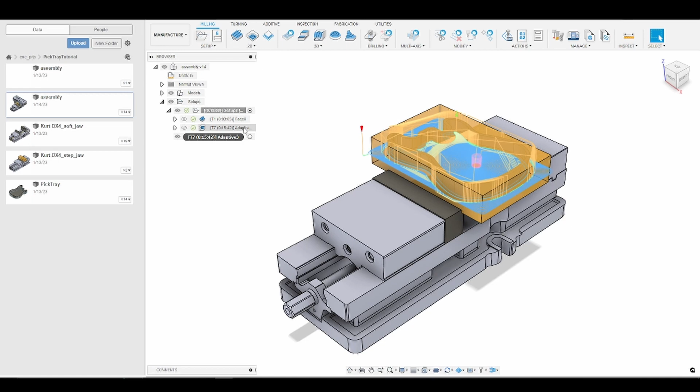So we did the first adaptive clearing operation with our 3/8 end mill previously. So we actually want to keep that same geometry and most of the parameters. So all that we need to do is right click our previous 3D adaptive clearing and go down to create derived operation. We'll go to 3D milling and then we'll click adaptive clearing again. That will bring over most of the parameters for us, and I'll show that to you. So now all we need to do is select the correct tool.

This time we are going to be using a 1/4 inch end mill, and I am going to be using a 3-flute 1/4 inch end mill from Shars.

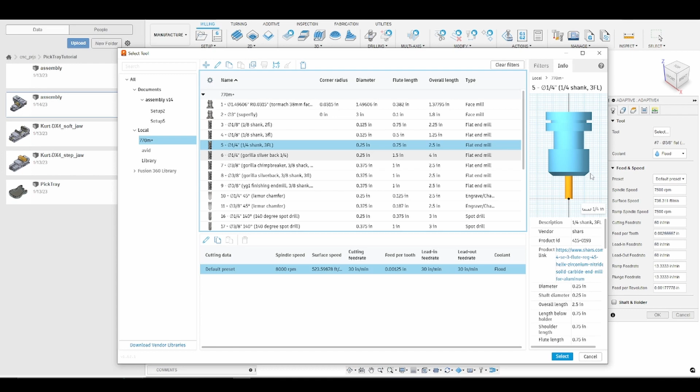So again, we're going to select our tool, click OK. Now we are running at 8,000 RPM and 30 inches per minute. So because the diameter is smaller, we can introduce more deflection, so we're going to be running slightly slower. Again, we can skip over the geometry tab since it's a 3D toolpath and Fusion takes our geometry into consideration for us. If we go back to the heights tab, you'll notice that Fusion, since we did the derived operation, kept our parameters for us. So the top of the model is selected so that we are not, again, cutting air.

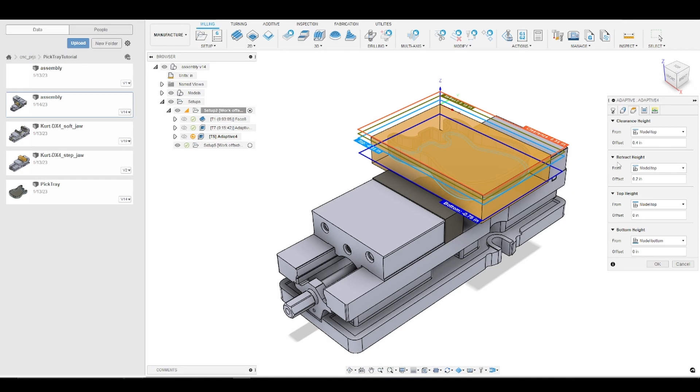All right, moving on to passes. You'll see that we still have our 20 thou stock to leave and a 30 thou optimal load. Now, our end mill diameter did change, so we're going to adhere to that around 10% rule of thumb for the diameter of the end mill, still sticking at 8%. So I am going to go at 20 thousandths for the optimal load. Again, sticking around that rule of thumb, 10% of the diameter, since we are using a smaller tool.

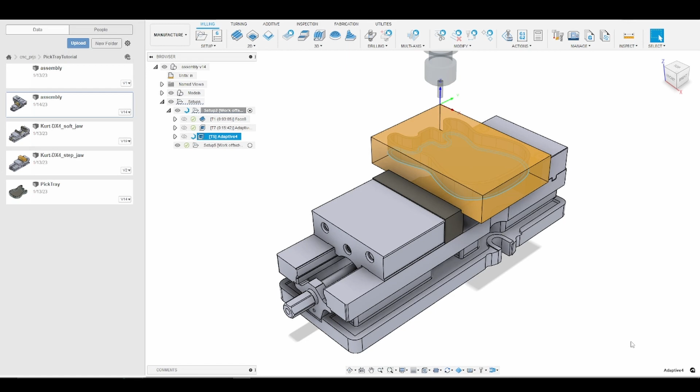All right, now we will just go ahead and go to our linking tab. And again, you'll notice that we have our ramp clearance at 10 thou for any helical entries. And we have our stay down level to least, which is exactly what we want as we went over in the previous tutorial. So we'll just go ahead and hit OK. And then we will quickly simulate this toolpath. And what you should see is that we will go in and clean up those tight areas that we were not able to get during the first operation. So we will go ahead and click simulate.

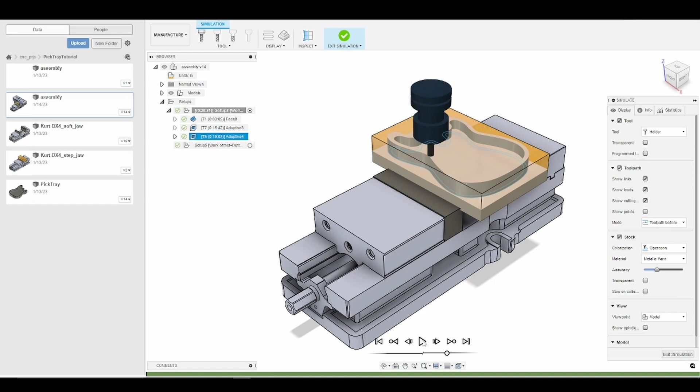And you'll notice this toolpath again just takes a long time because it is a roughing strategy. We're removing a lot of material. So we'll slow it down so we can see. We'll press OK. So again, we're just going in and getting rid of all that material that we couldn't get with the 3/8 end mill. All right. So we'll speed it up a little bit and wait for the simulation to finish. There we go. So now our part is completely roughed, and we'll go ahead and start finishing our part.

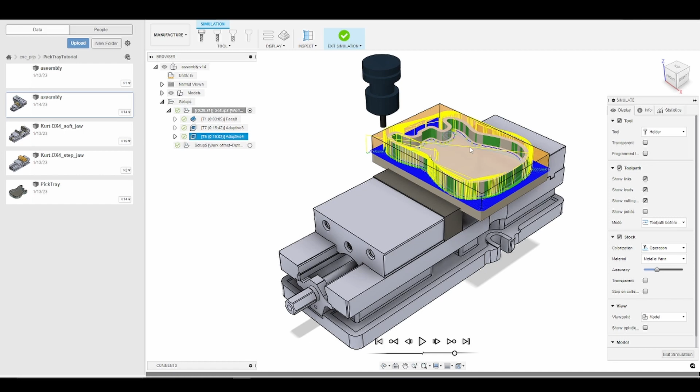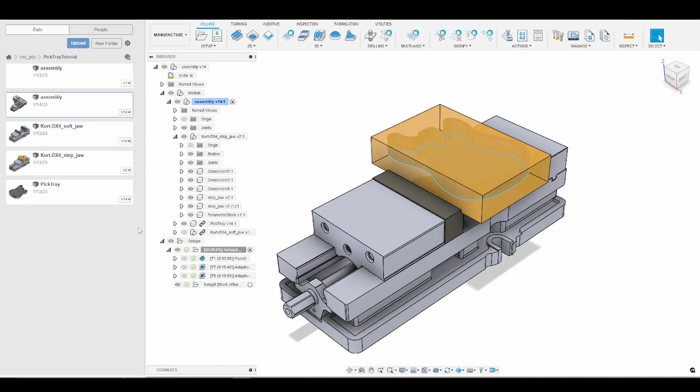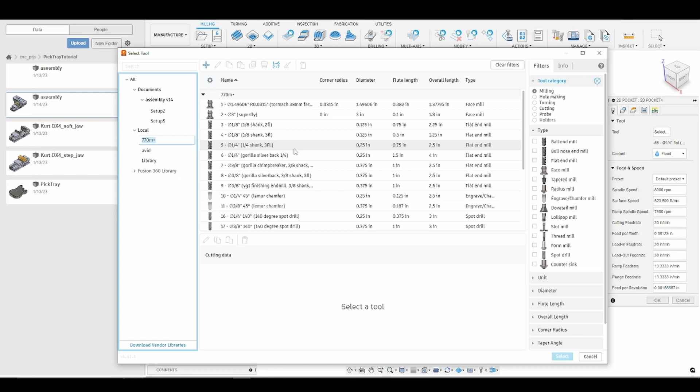So to begin our finishing operations, we're going to perform a pocketing operation. So we're going to clean up the floor and the side walls on the inside of our pick tray. And so the first thing I'm going to do is hide our parametric stock just to make it easier to select our geometry. So I'm going to navigate through the assembly. There we go. Close that, and then we're going to go to 2D and we're going to go to pocket. As always, we are going to select our tool. I'm going to go to my 770 library and select the same 3 flute 1/4 inch end mill from Shars. Select OK. And we'll go over the speeds and feeds.

We are at 8,000 RPM again, 30 inches per minute. I'm comfortable with 30 inches per minute. I think I will be able to get a nice surface finish without any tool deflection. And you'll notice our feed per tooth is closer to 1 thou, 1.25 thou. The rule of thumb there is you typically want to be at 1 thou feed per tooth or more. That will prevent any type of burnishing. You don't want to burnish, that will ruin your end mill. So I'm okay with that.

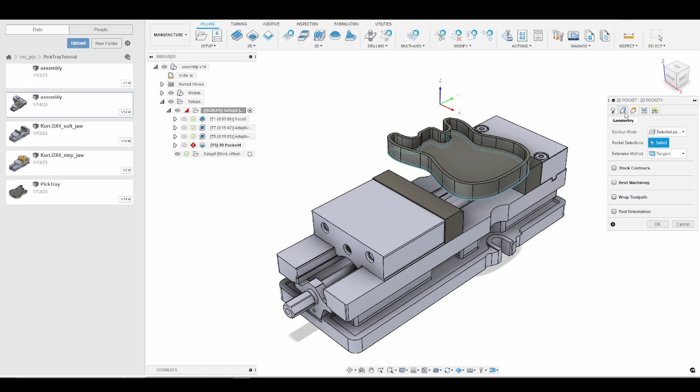We'll go to geometry. Because it's a 2D toolpath, we need to select our geometry this time. So we're going to select the inside contour here. And you'll notice our floor has turned blue, so we will be performing our pocketing operation on the inside floor of our pick tray, which is exactly what we want. So we'll come down, we will finish the floor, and then engage and finish the sidewalls in one toolpath.

All right, so let's go to our heights tab. And again, you'll notice that Fusion has chosen the top height to be the stock top. We want that to be the model top again so that we prevent ourselves from cutting air. Our first operation was a facing operation where we removed the 50 thousandths from the top of our model, so we no longer have stock above the top surface of our model. So if we were to choose stock top, we would just be cutting air. All right, so we're going to choose model top for the top height, model top for the retract height, and for the clearance height.

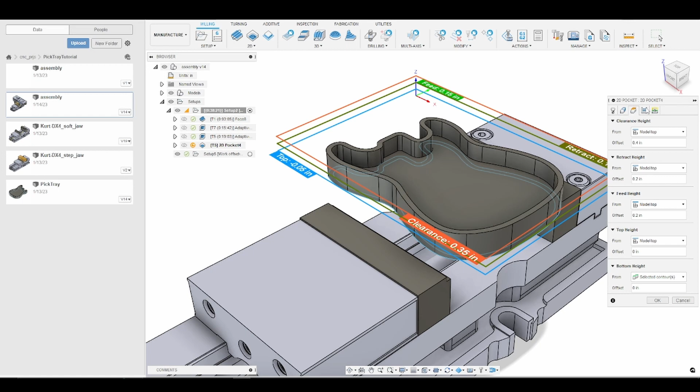We will want to go ahead and examine the bottom height. We notice that that is a selected contour, so that is the floor that we selected. So that is perfect. We'll now go into the passes tab where we have some more interesting parameters.

So the main thing we want to do here is select our step over. We want that to be between 50 to 75% of our end mill's diameter. I'm going to go with 50%, which is 125 thousandths or 1/8 of an inch. And again, if we go too large on our step over, we run the risk of introducing cusps, which are little lines between our step overs that you can see and feel, so it will degrade our surface finish. We don't want that.

The next interesting item that you could choose is morphed spiraling, and that will really just smooth out the toolpath, and it will try to get rid of any sharp turns. This can help reduce any kind of witness marks you may leave behind. I'm not going to use morph spiraling because I feel it doesn't give you a visually appealing surface finish, but I'll show you here in a minute what that does.

And we are going to uncheck stock to leave because this is our finishing operation. We don't want to leave any stock. We do want to finish our sidewalls in the same pocket operation that we are finishing our floor. So I'm going to go ahead and select finishing. I'm going to select 3 finishing passes, and I'm going to make my finishing step over at 10 thou, which again will prevent any tool deflection when we engage the sidewalls.

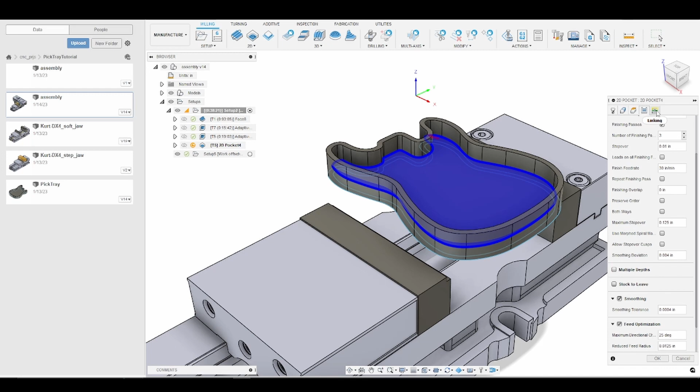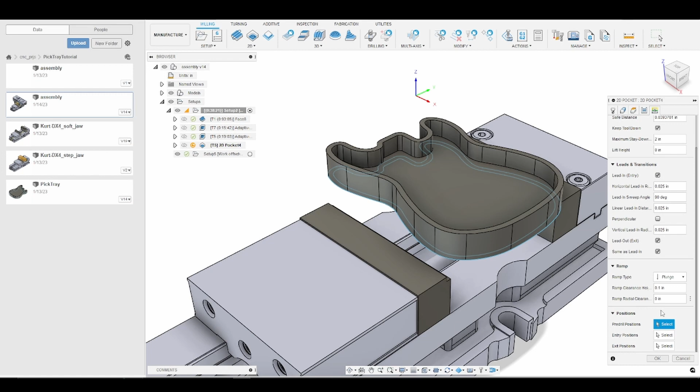All right, we will now get into the linking tab, and the main parameter here that we want to consider is the ramp. Because we have already hogged out all of the material inside of our part, it would be a waste of time to perform a helical entry. So we're just going to plunge down and then instantly start finishing our floor. So now I am going to click OK, and then right click and simulate. Actually, before we do that, we'll go over the morph spiral.

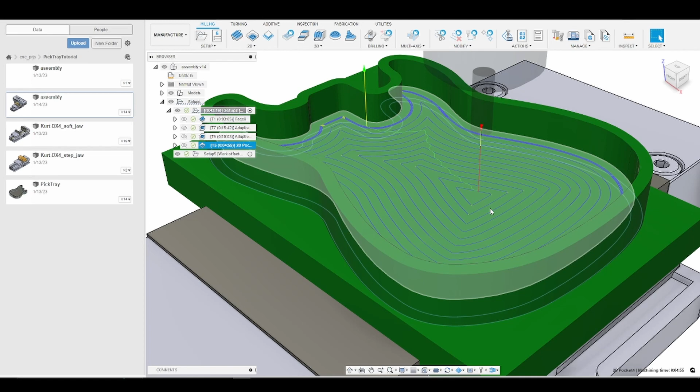So if you look here at our toolpath, you'll see it's triangular and it's visually appealing, but we do have some sharp turns here that could introduce little witness marks. Again, feed optimization will help relieve some of that issue. But if we right click and go back into edit, we go to passes and we enable use morph spiral machining. Click OK.

You'll notice that Fusion indeed smooths the toolpath, so we don't have all those sharp turns, but in my opinion, this will not leave a visually appealing surface finish, and I want to be able to show the pick tray off to your friends or your family as a first part you made on the CNC machine. You want it to look nice so you can show off. To me, this doesn't. Even though there's nothing wrong with doing this, it's actually probably better in terms of providing a smoother surface finish and reducing the witness marks.

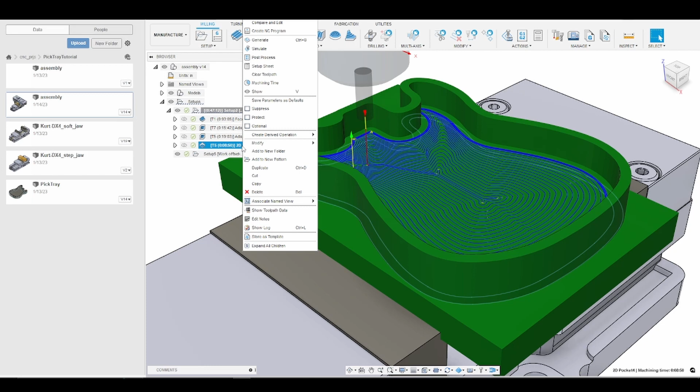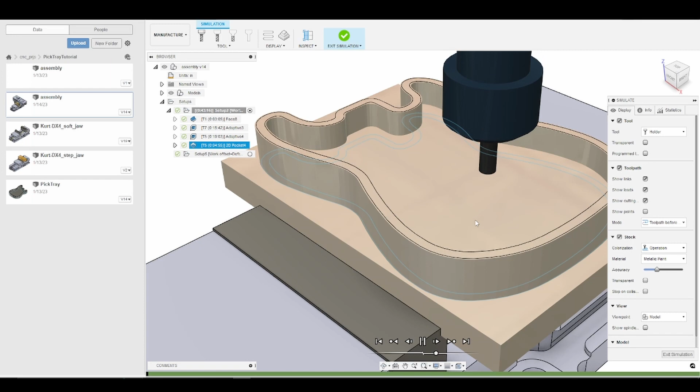So I'm going to go back to edit, and I'm going to disable morph spiral, just because it provides, in my opinion, a more visually appealing surface finish. All right, so now we're going to right click and simulate. We'll slow it down so we can try to capture the plunge at the beginning. So here we go. So we're plunging straight down, and then we start performing that triangular motion, which just gives us a nice surface finish.

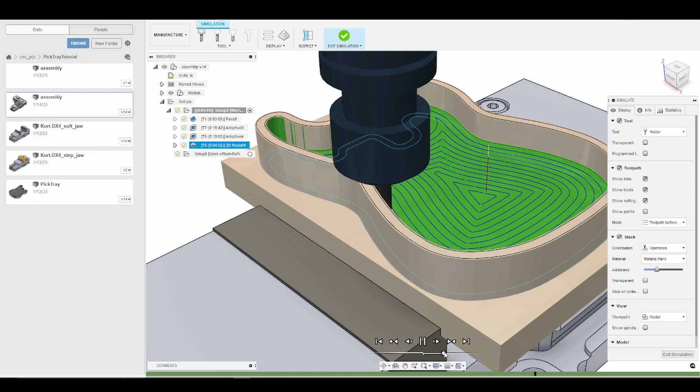Okay. And now we'll just speed it up until we engage the side walls. We'll slow it down so you can see that we indeed finish the floor and then finish the side walls in the same operation. So that is it for our pocket.